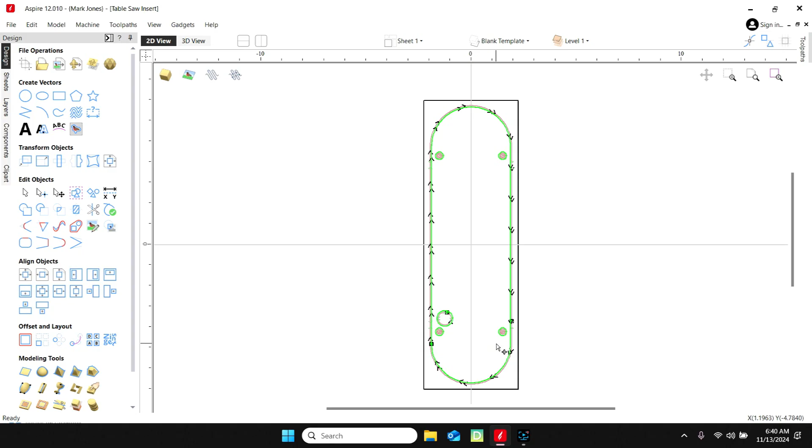I downloaded a table saw insert file here the other day. It's been a while back, and the file had some other stuff in it that was pretty unique, and I didn't really need them for my saw, so I removed those components. But this is what I ended up coming up with for my Delta contractor saw.

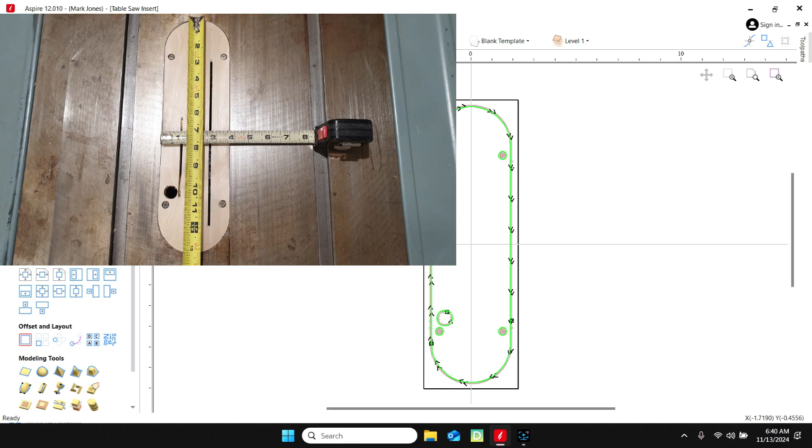It's a saw I bought from Lowe's 12, 14, 16 years ago. This plate fits that saw, the dimensions of it, the finger hole, and the little mounting brackets in there. So I went out and made a couple of these yesterday, and they came out just perfect. They fit in there perfectly.

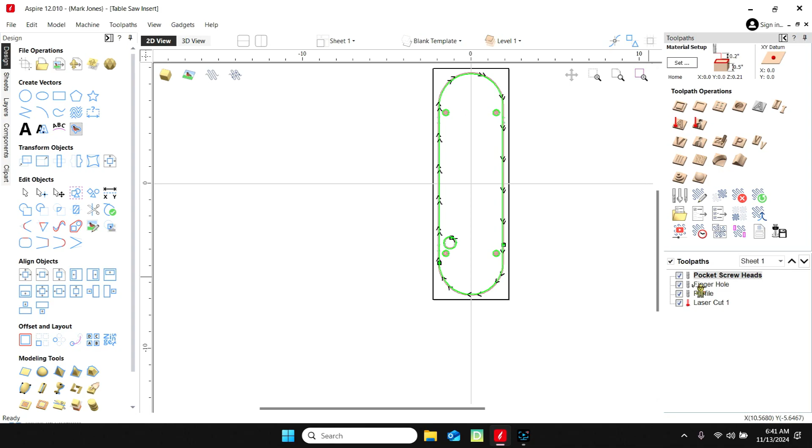Basically after you cut this out, you just go over and sand it on the sanding machine, clean up the edges, clean up the faces, and it'll pretty much just drop in. It's snug, but it fits in there just fine. You could probably sand it a little bit more if you wanted it to come out a little easier.

But anyway, what I ended up doing was put in screws in here. Let's go ahead and look at this thing in a preview. This is a reset preview, all toolpaths, so you can kind of see what this looks like.

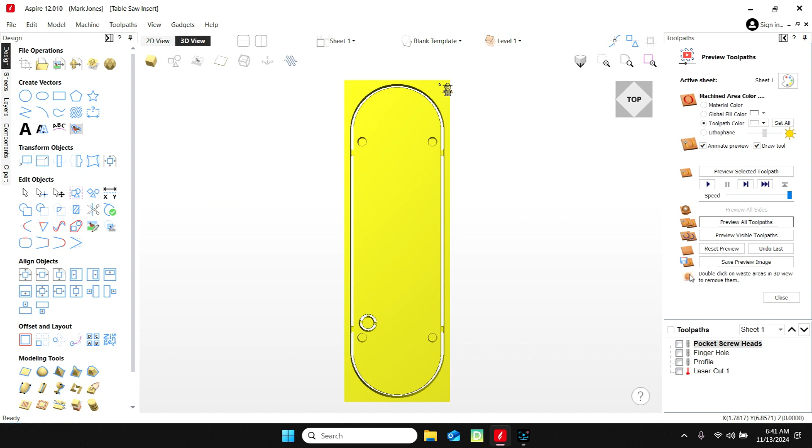I used a little panhead, self-tapping panhead screw. It had a little round top on it. The material is right at a half inch full in thickness.

So what I did is I put a pocket down in there so I wouldn't need to use my Forstner bit. Then in the very center of it, I'd drill basically a hole that would fit the panhead screw. They were self-tappers, so I'd probably just go with a little smaller hole and let the self-tapper drill its own hole.

When you're using your table saw, all you need is these screws to bring these edges up here, and these edges up here, flush. If it's much more than a 64th or 2/64ths of an inch in difference, your saw blade will get hung up there. So you want something that can bring that up.

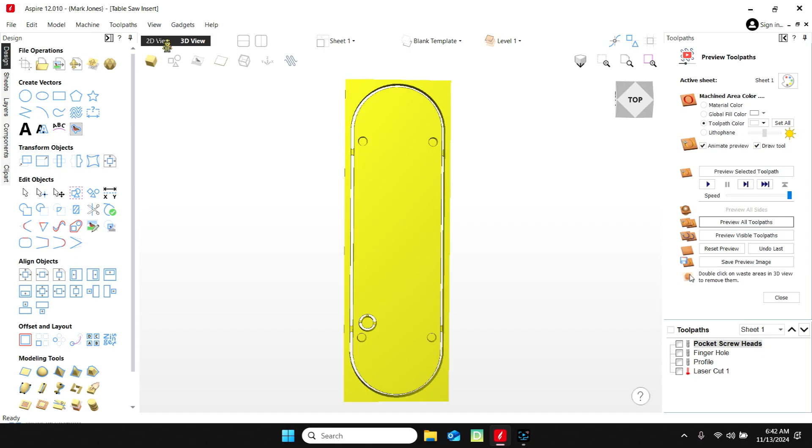Of course, my table has these little wings with the screws to sit on there. So that worked out good. I milled it out, and it worked out good.

I did a pocket there, then did my finger hole for that, and cut out the profile. Then I used just a laser cut to make sure it was going to fit. I basically went over the material real lightly with a laser and just etched it along the line on top of the board, and said, okay, yeah, that's going to fit.

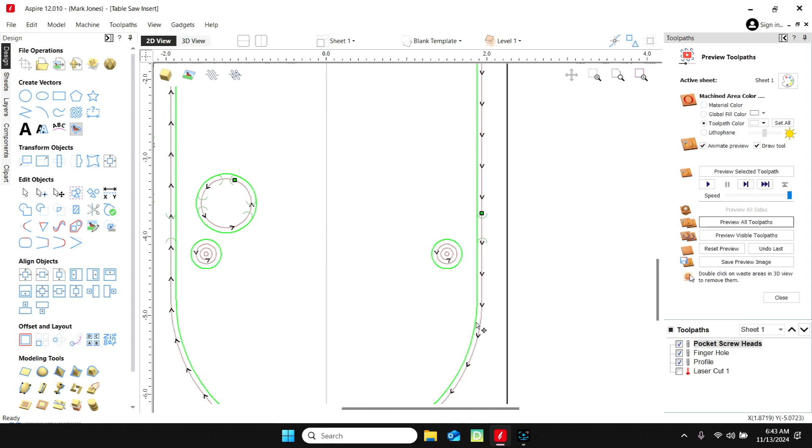So if you need the file, holler.

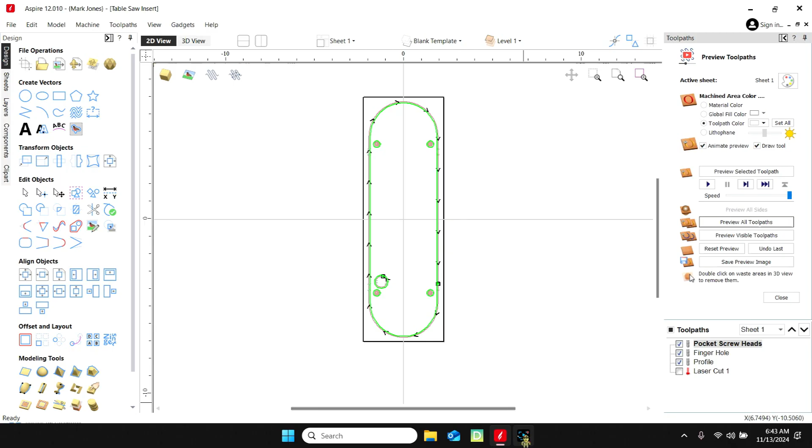I thought I need to have a table saw insert, and I needed something that was really close to that, so I found a piece of plywood that was really close. I thought it might be a little bit tall, and it says half inch, but it was just a hair above half inch. Anyway, after I loaded it up into Aspire and cut it around, I got it all to fit just fine.

We got that good. Then I had it drill holes for these, which was a mistake. I should have just used a 1/8 inch bit and drilled them, and maybe just laser it. I'll go back and edit that out so I don't make that mistake again.

But anyway, I re-drilled the holes, glued in a 1/4 inch dowel so it would have a good hole, then screwed it down and countersunk the hole, and sanded the heads off of it that were just a little bit round.

As you can see, they're just a round screw, but they keep it from rocking, and it's real close, very, very close. You can't feel it when you run your hand across the board. So that's good, and that worked. I made an extra one, and I have the tap file. So there you go, we're set to go.